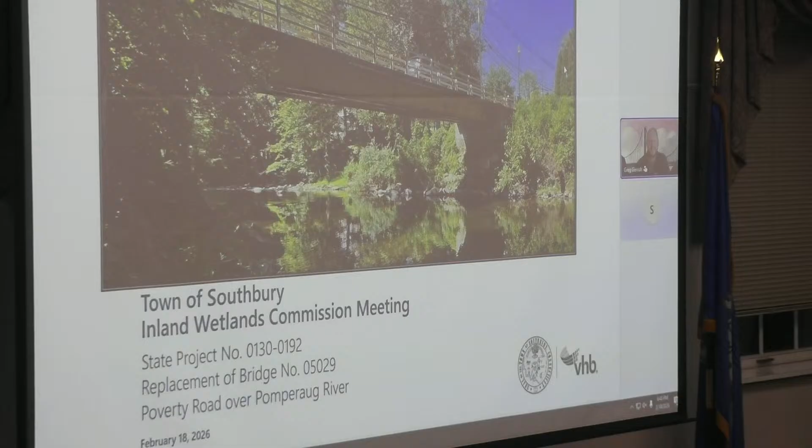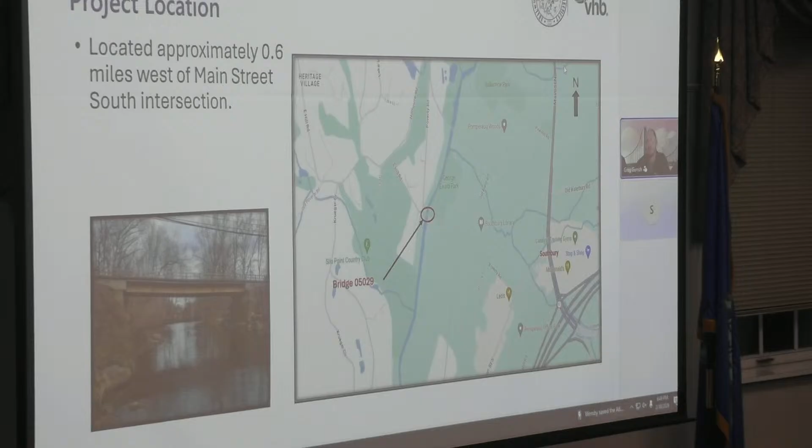All right, great. All right, so here's the project location, just to show where we're located. So the project is located 0.6 of a mile west of Main Street South. I'll do an aerial on the next slide so you can see a little more zoomed in.

So the project site is located over the Pomperaug River with George Ewald Park to the northeast. There's a town-owned detention basin to the southeast, and we have the golf course to the northwest, as well as condos and private residences.

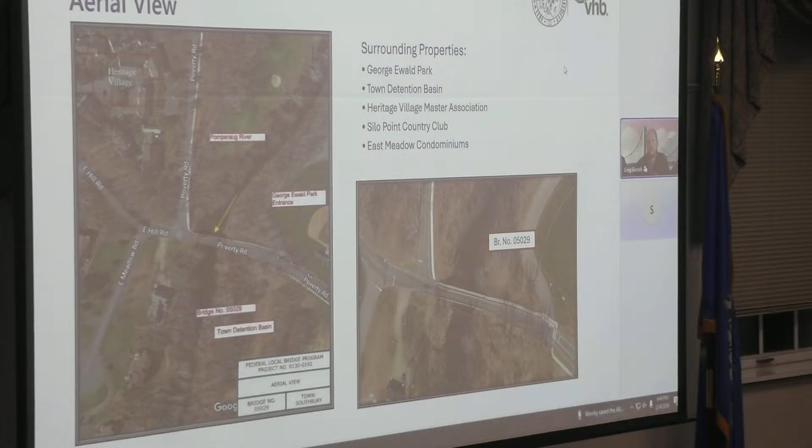So the purpose and need for this project is to replace the functionally substandard one-lane facility and provide a structure in a state of good repair that's capable of meeting current load rating and highway design standards. Really, the biggest push for this project is the one-lane facility and traffic issues involved with it supporting a significant amount of traffic for this size road.

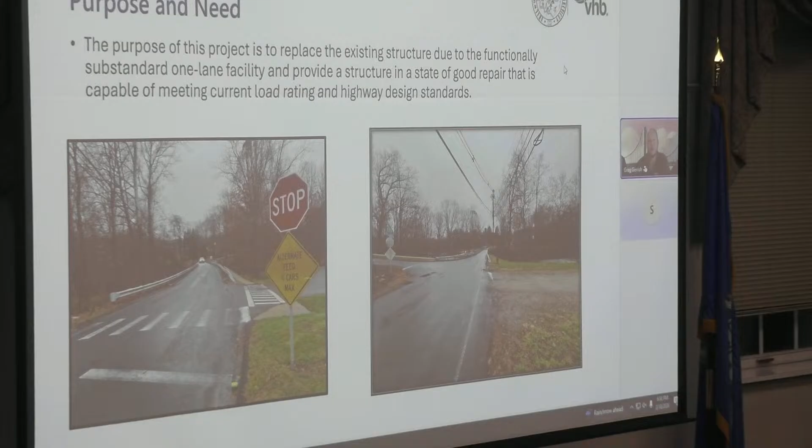The existing condition, a little more details. The year it was built was 1967. There was a reconstruction project that was basically a deck replacement in 1989, and the superstructure is a steel beam structure. It sits on stone masonry gravity abutments with unknown foundations that likely sit on bedrock.

There's a single lane of traffic, stop controlled, as you can see in the bottom left corner. I'm sure many people are familiar with this, and it supports nearly 4,500 vehicles per day. The structure length is 108 feet. The clear span, so the span over the river, is 71.5 feet.

As you can see, the abutments basically sit in the river as it currently is. So keep note of that, as we'll be expanding the bridge. You can see that there's large riprap in front of the abutments currently to protect those.

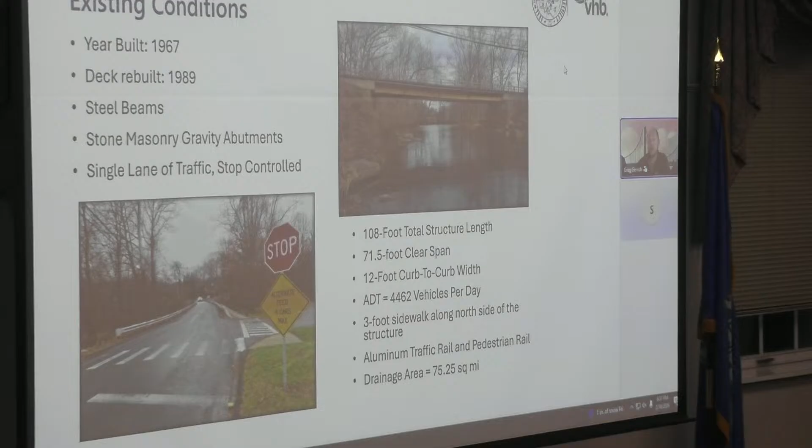So the current curb to curb width is 12 feet. There's a 3-foot sidewalk on the north side, aluminum traffic rail, and the drainage area is 75.25 square miles. So decent flow through this bridge.

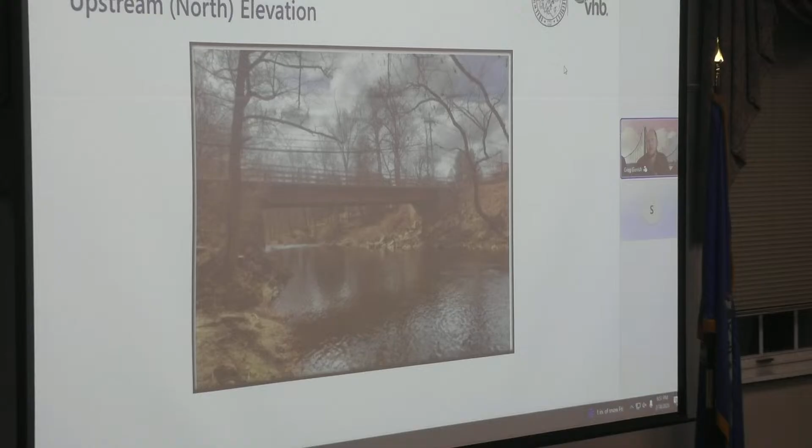So a couple of additional photos of the bridge. This is upstream on the north side looking south. So this is the inlet side. On the left is angler access for fishing and access to the park. This is the downstream side looking upstream back with the golf course on the left and the Ewald park on the right. Take note that the Pomperaug River flows north to south.

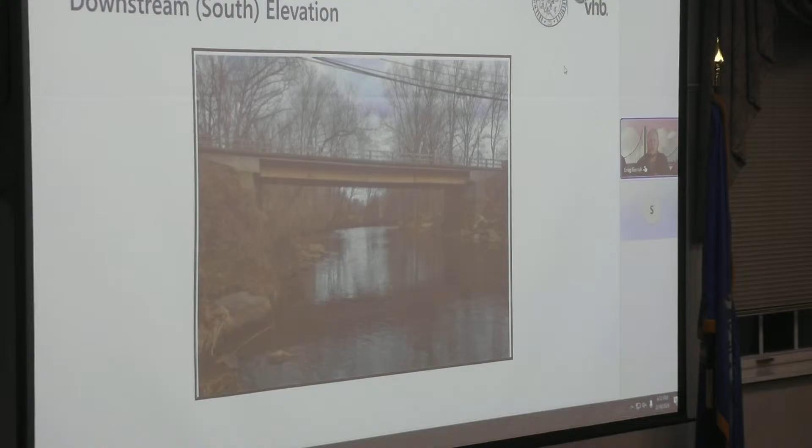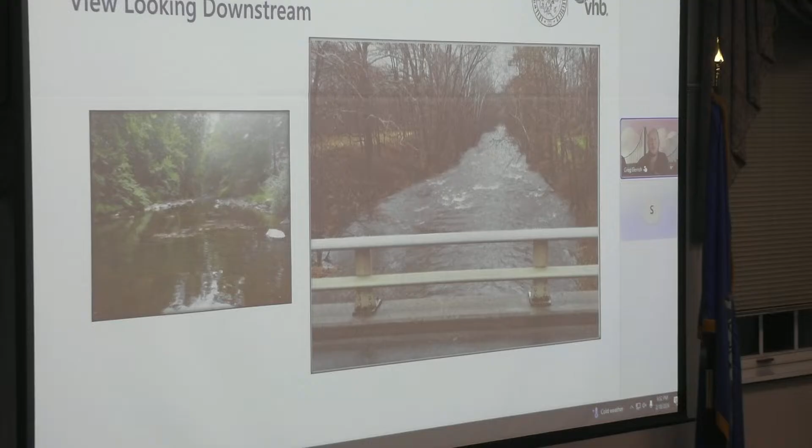This is looking downstream, same event on the right with the bank full flows, and on the left with low flows and the boniness, and really there's bedrock just below. A lot of this kind of topping of stream bed material.

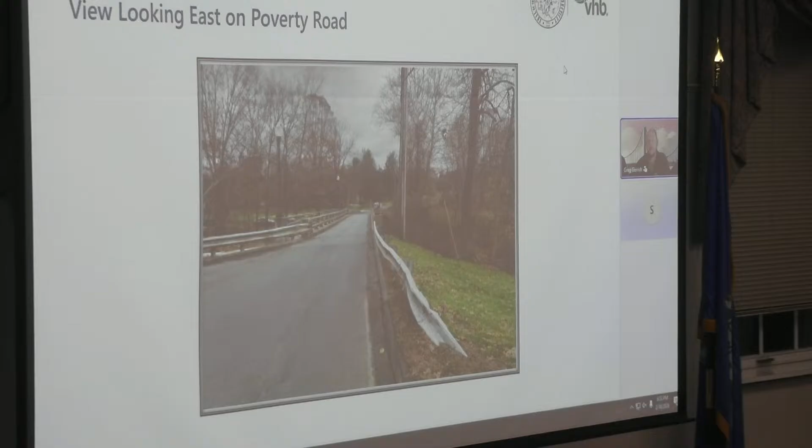There's a view looking to the east towards Ewald Park, so across the bridge, the one lane just behind us is the intersection. I don't know if I had another, here we go. So there's a couple steps back looking at the intersection, Poverty Road going up the hill, and this did limit how far we could widen the bridge to this side.

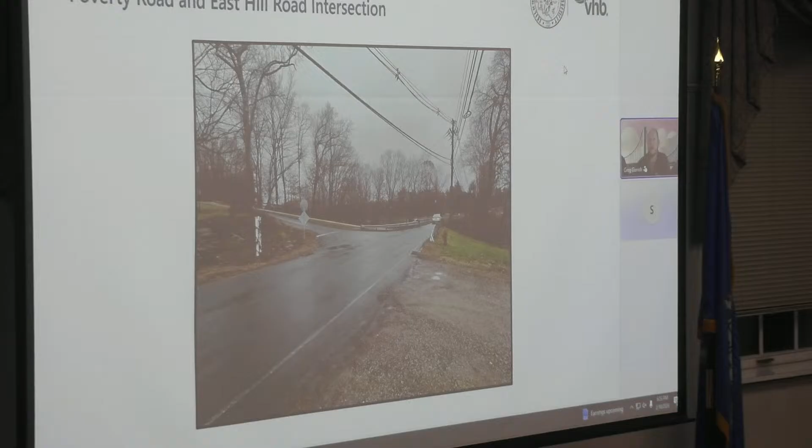So basically the bridge is going to be widened to 95 feet, minimally towards the west and mostly towards the east because of the intersection and private property. And here's a view looking west across the bridge and the 5-foot sidewalk.

So the site is in a FEMA flood zone with the FEMA floodway. The project has received approval from the town of Southbury floodplain manager. And that was included in the submitted documents for the project, the application.

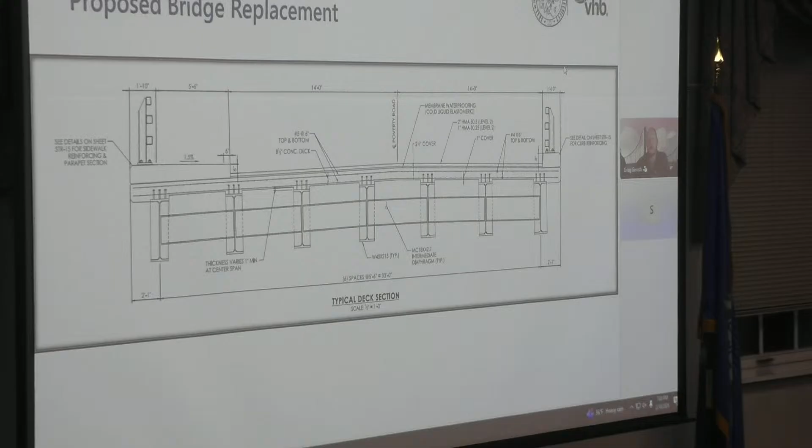This includes widening the clear span to at least 20% greater than the bankful width; 1.2 times bankful width is an Army Corps best management practice. The 95-foot clear span exceeds that. The proposed bridge will be 95 feet wide, which spans the natural channel and allows the proposed embankments that you see here with riprap to match the upstream and downstream profile of the existing channels, which is a great benefit to the environment.

So this also, increasing the clear span, increases the hydraulic opening. So this decreases flooding and improves the efficiency of flows through the bridge. Scour isn't really an issue here, as the new foundations will be set on bedrock.

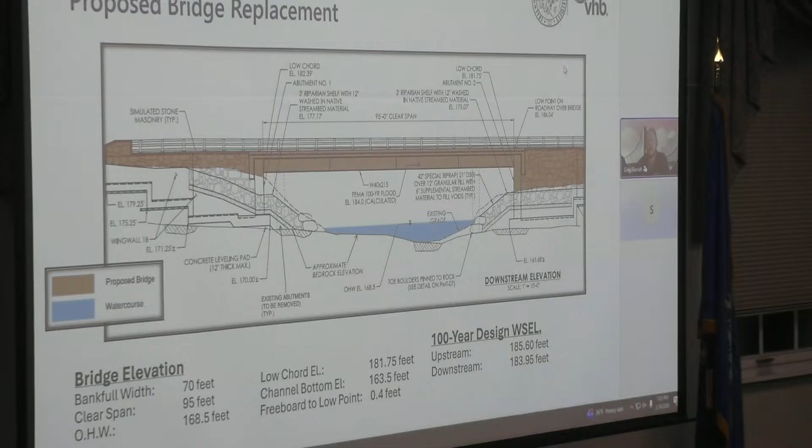All right, so water handling. So in order to remove the structure, traffic will be detoured around the site, so the road will be closed. Poverty Road will be closed basically to the intersections in either direction, with local traffic allowed to the park only. A debris shield will be installed below the existing deck to prevent debris from falling into the river as they remove the superstructure.

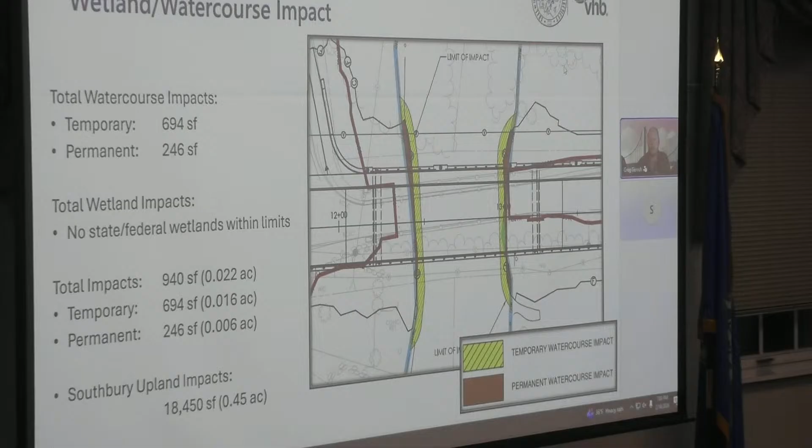And I'll note that areas for stockpiling materials will be determined by the contractor. Any material that can't be stockpiled on site will be coordinated with the town. So that's up to the contractor and the town to work out once the contractor's on board. That'll be at an offsite location, likely somewhere nearby, as would be beneficial for resources, time and money.

And as you mentioned, the widening of the bridge increases hydraulic efficiency and capacity, and because of that, the flood levels are reduced due to that increased hydraulic opening. So there will be no adverse effects to the Pomperaug River floodplain. At the low point, which is basically right around the entrance to Ewald Park, currently the 50-year is expected to overtop the roadway by about 2 feet.

So I think there was a similar event to that 2 years ago, when there was significant flooding in the Southbury and Oxford area, and there was some overtopping, I believe, of the roadway, and I know the flood levels got pretty high. In the proposed condition, we're looking at about 6 inches of water at the low point. So a significant decrease due to the increased hydraulic opening of the structure, and we did as much as we could there to decrease the floodplains.

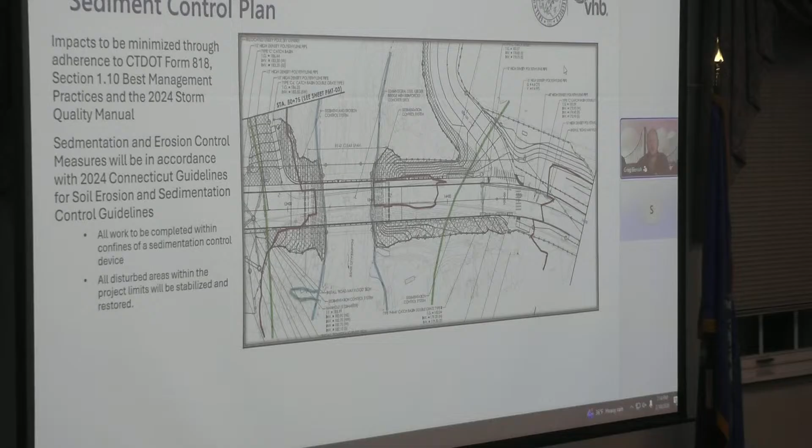All right, just a couple more slides. As we said, we've had a lot of coordination with state and federal regulators, and as part of that coordination, DEEP Fisheries was coordinated with, and for this bridge, unrestricted fish passage is being maintained. There's no removal of a pier here, so that was held over from another.

But due to the open bottom structure, there is a decreased bridge constriction, and unconfined in-stream work within the stream is restricted to the period June 1st through September 30th. So outside of that time period, work must be confined, meaning behind cofferdams. Typically, that allows the installation of cofferdams.

So typically, in the spring, depending on how quickly the contractor can get to it, the cofferdams will be installed in April or May, and then they can work behind confinement. From the period of June 1st to September 30th, that confinement's not needed. Typically, it's maintained. But that is the DEEP requirement for fisheries for this site.

And there is, of course, a diverse fish habitat at the Pomperaug River through this bridge, and that needs to be maintained. DEEP NDDB, so Natural Diversity Database, or the state listed species. This is within an NDDB area. A final determination was received in January based on the project and permit plans, basically saying that there is no expected impact due to the proposed project.

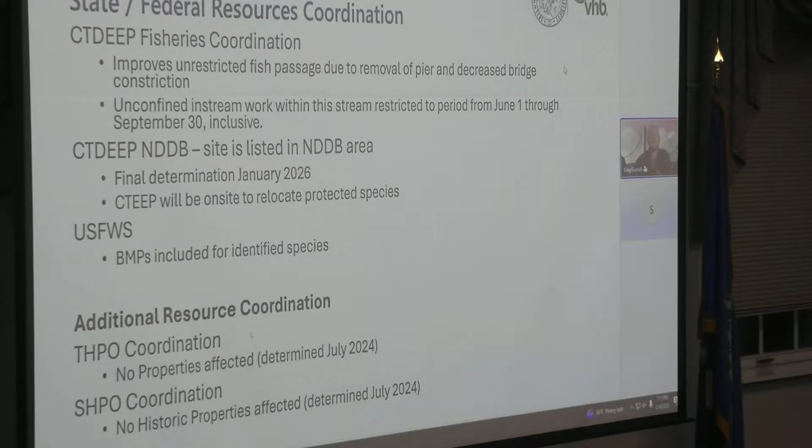And SHPO and THPO, so the State Historic Preservation Office and the Tribal Historic Preservation Office, have been contacted and determined in July 2024 that no historic or tribal properties would be affected as part of the project. And for the permitting, just to run you through, Southbury Inland Wetlands and Watercourses is why we're here tonight. And we've already spoken to the floodplain manager and received that sign off.

With the state, a state flood management certification will be obtained for the project. That's in the works of being approved. That's for the hydraulics and flood flows. The DEEP pre-construction notification is currently required under the current general permit for Connecticut, and federally an Army Corps pre-construction notification is required, and that'll happen once the design is fully complete. We are at 90% design now, so we are nearing completion.

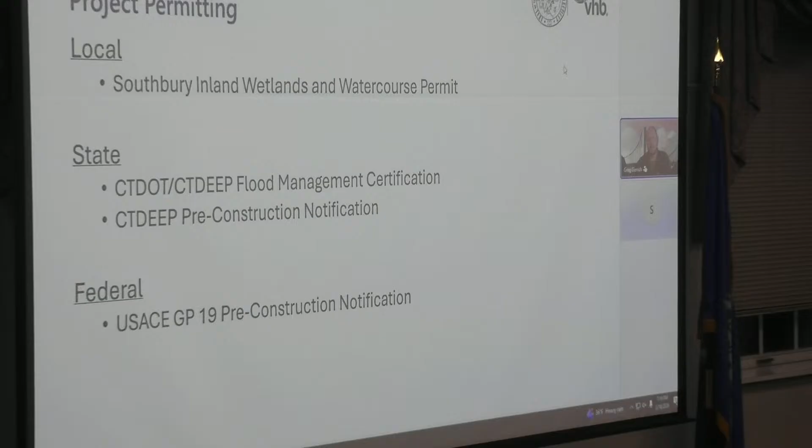And the one last thing to note is that construction is anticipated to begin in October 2026 and last approximately 16 months. It's expected that in 2026 you're just going to have clearing and grubbing and utility relocation, and then the bulk of construction would take place starting in the spring of 2027. And as we noted, the in-water work would be 13 weeks in 2027. And with that, the presentation is concluded, and I will open it up for any questions.

There's a lot of information. Thanks, Greg. Who has questions? I have one, but I don't know if this is the right forum for it. As anyone who drives over that bridge knows, it definitely slows down traffic, which is potentially a good thing. It's right next to the park and the school zone. Have there been any conversations around the fact that the flow of traffic is going to increase, the speeds are going to increase? Is the town thinking about perhaps putting some elongated speed bumps to keep those speeds down around those areas where there's a lot of children and pedestrian traffic?

Would you like to address that, or shall I? Greg? I mean, I can address it. It would be part of the highway design, and that wasn't identified as needing speed bumps due to increased speed. It'll still be designed for the same 25 or 35 miles per hour through the site. So I don't think there's an expected significant increase, just allowing flow through. But if you have something to add, absolutely.

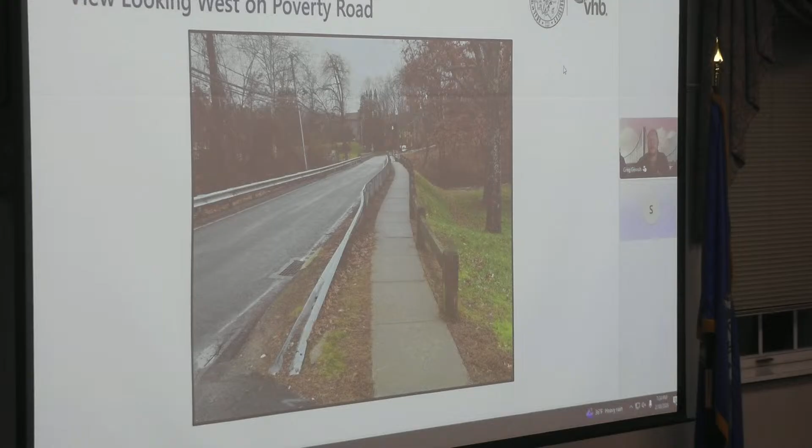Okay. If I understood you correctly, the elevation of the deck is remaining the same? The height of the new deck is the same as the old deck? Yes, I think it is slightly higher than the existing, but I think it's about 6 inches difference. I did notice on the plan that the driveway going into the park will be raised a couple of feet. Yes, and the reason for that is the highway standards, to smooth the curve and raise that low point up a little bit. The low point being where you turn right at the stop sign to go into the park? Yes. Okay.

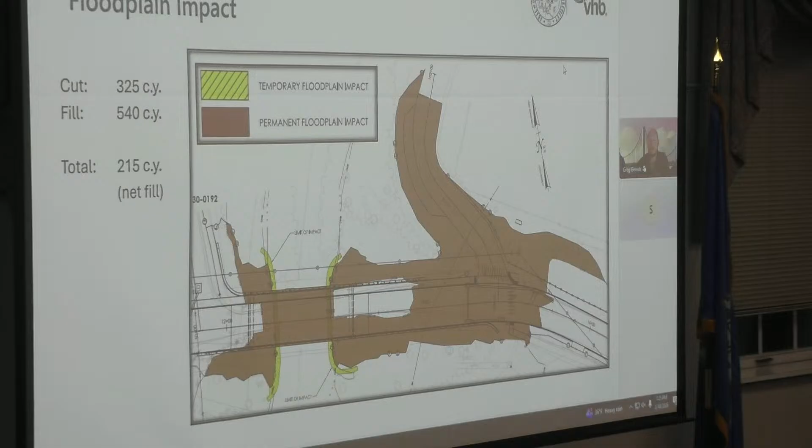Are you doing any kind of plantings or seeding any areas on this project? Or is it all just left as riprap or gravel? There will be a grass established following the project. Other than that, there's no plantings that have been identified at this time. Okay, there's not a separate planting plan, but it will be reestablished with grass seed. So on all the areas where you're doing the riprap, you will be adding topsoil and seed at some point?

Not on the riprap. On the areas where there is riprap, there will be fill in the voids of the riprap. But other than that, I don't believe that there is seed for the top of the riprap, but at Poverty Road, there will be topsoil and seed, and on the embankments where there's not riprap, there will be topsoil and seed. Okay.

You are increasing the area of the road, which of course increases, at least in a small amount, the amount of stormwater that you're collecting and releasing. The outlet structures and everything that are in place, I don't believe you're planning to change any of that. Do they appear to be in good condition and appropriately sized for the additional runoff?

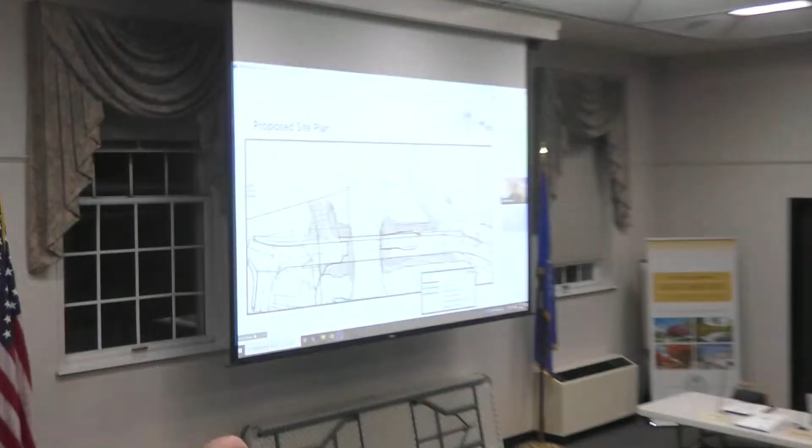Anyone else? Yes, certainly. So Greg, this is the administrator for the Land Use Department. I'm currently running the stream today, but I had a quick question, if you wouldn't mind going to the slide before wetland and watercourse impact. This is the one where you guys show the concrete washout.

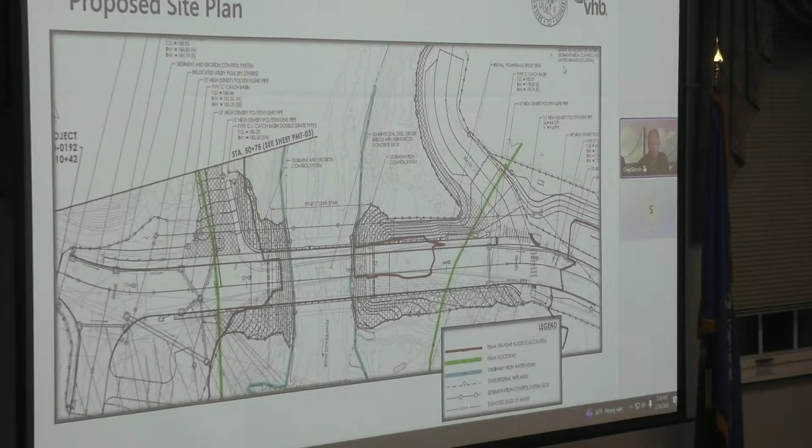For the wet. So the water handling, oh yeah, there is a concrete washout, yes. Yep, go ahead. Okay, so you guys do have that. So the reason I asked this question is I would imagine, given the road's gonna be gone, you're gonna have to hire a pump truck. You guys are gonna be staged on one side and you're gonna end up pouring for both sides of the bridge abutments, correct?

Correct, it'll be poured for both, but they may be staged on either side, if that's what you're alluding to. So you guys would be free pouring from the concrete trucks and not into a concrete pump truck? That's a question for the construction side, I can't answer that question. Okay. The reason I ask...

is, depending on what side you stage this on is gonna depend on where the flow of traffic for those concrete trucks are coming. So they're either gonna come from Hild House or Oldfield Road, and I was curious if you guys had considered that traffic pattern and the trucks that would be traversing it in choosing that side for the concrete washout rather than the eastern side. Because I imagine they'll be coming from both sides.

Yeah, okay. So you're gonna need a concrete washout on both sides, right. Okay, so that'll have to be added to the plan. Okay. We can do that. All right, what's your pleasure? I don't see any other issues with it, to be honest with you.

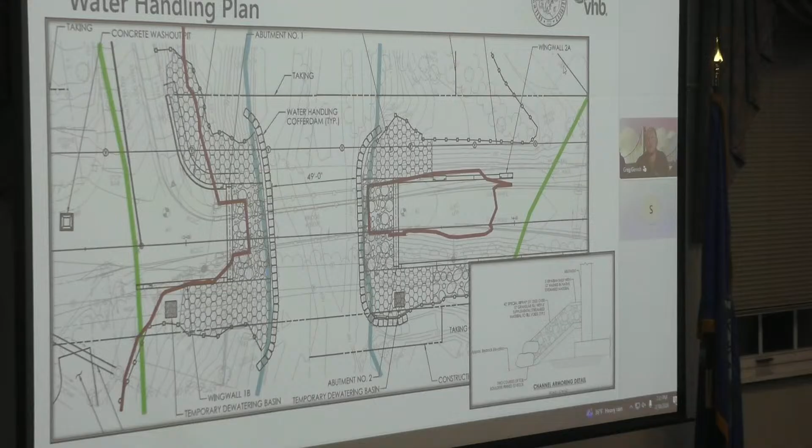So do we need to modify our draft resolution for a couple elements? Yeah, so there's a few elements. So we're going to add the condition about the stockpile locations being coordinated with myself once those are ultimately determined. We're going to include the quantity of trees that are removed to match the plan.

And is that something in our approval, or is that something to add to the plan? No, it's already on the plan, but just clarifying the comments specifying which trees are specifically being removed, so adding that on there, not as a condition, but more as a whereas statement. And then adding a condition for an additional concrete washout to be shown on the plan on the eastern side of the bridge, and that final plan would be pending the approval.

I was gonna suggest perhaps a weekly update or report from the engineer in charge of the site. Oh, you have an inspector there? I think so, that inspector will be out there conducting those reports. I'd just be curious to see, because they have the inspector reporting to the town. Curious who they're reporting to directly. Okay. So you want clarity on who the inspector will be reporting to, because Deandra would be a critical component of those reports and being able to respond to that.